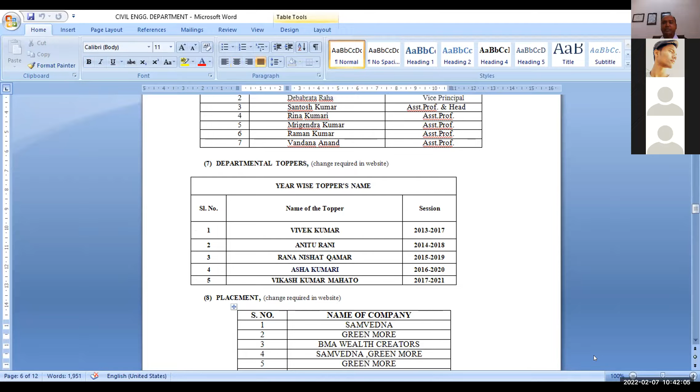In the 2013-17 batch, Mr. Vivek Kumar. In the 14-18 batch, Anitu Rani. In the 15-19 batch, Rana Nishat Qamar. In the 16-20 batch, Asha Kumari. And in the 17-21 batch, Vikash Kumar Mahato.

These are some company names where our students got placed, like Samvedna, Green More, BMA Wealth. Many companies visit our college to select students from different branches.

Our department also achieved some awards, like in cricket tournament and taekwondo. Our department was runner-up in the 4th annual cricket tournament, and the same batch won first prize in the 5th annual cricket tournament in 2019.

And silver medal in taekwondo - at this time I forgot the name of our student who... oh okay, sorry, Payal Kumari. This is the name, Payal Kumari, who won silver medal in taekwondo in 2017.

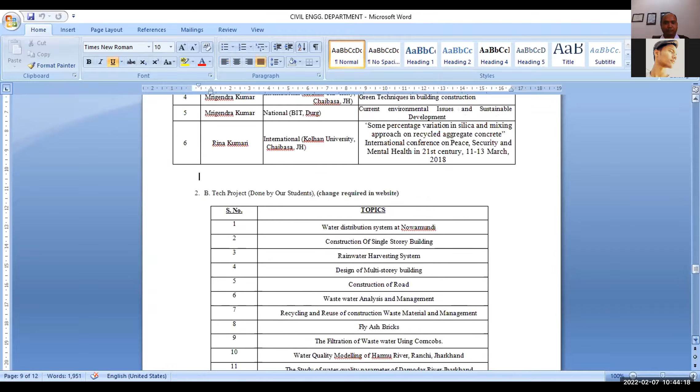These are some events where our faculty members joined workshops and seminars. There are some names of workshops and seminars, and our publications by our faculty members. These are some topics of projects done by our students in previous batches.

These are the labs and semesters that attend these labs. In our department there is also a departmental library where some books are placed, and you can access these books in physical mode. So this is the introduction of our department.

I want to show you some videos with which you can get motivated by our students.

Anyone want to say something? Sandeep Kumar Mahato, yes sir, you want to say something? No sir. Okay, so mute your mic.

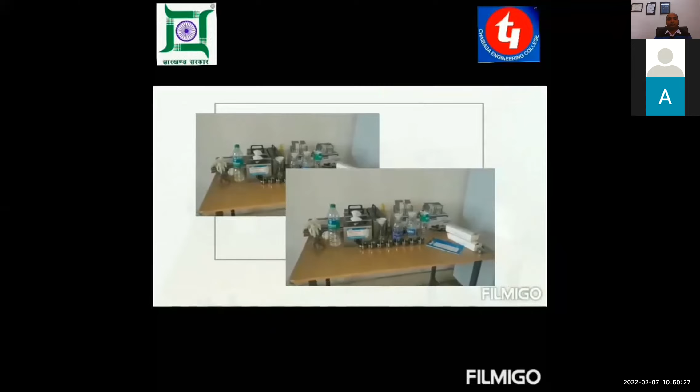So this is some tour of our department. In detail, there is some content shown by other faculty members. So thank you, over to our host, Miss Arpita Ghosh.

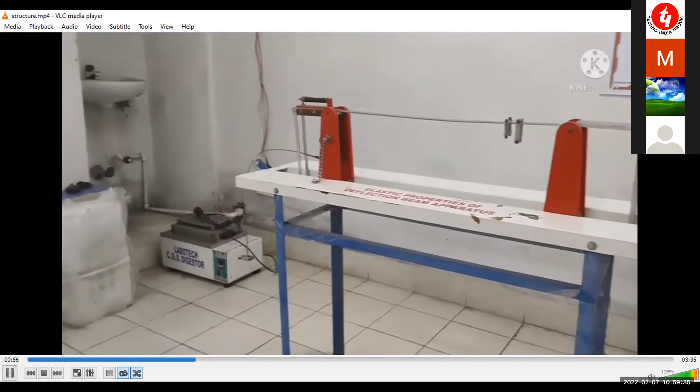And the other apparatus you see here is the simply supported beam used to verify Maxwell's theorem. You can see the simply supported beam.

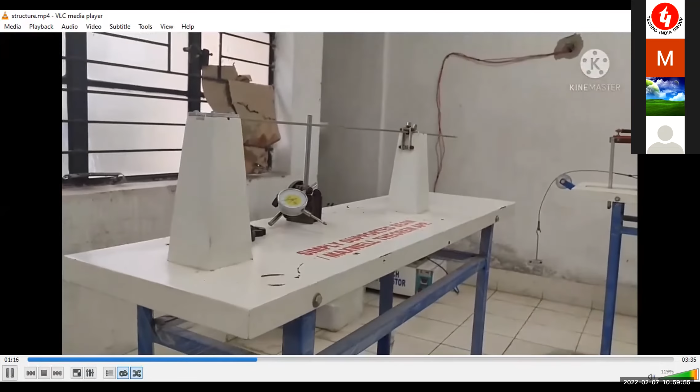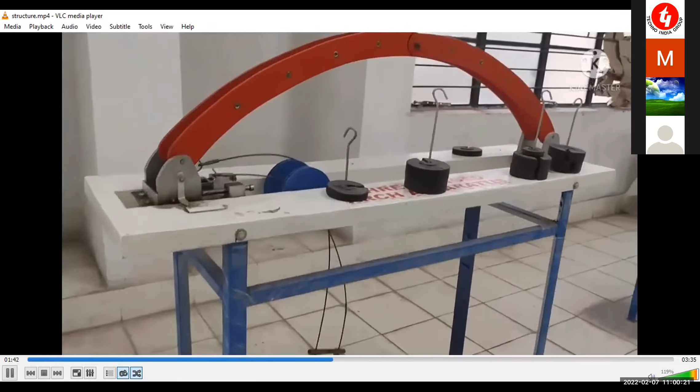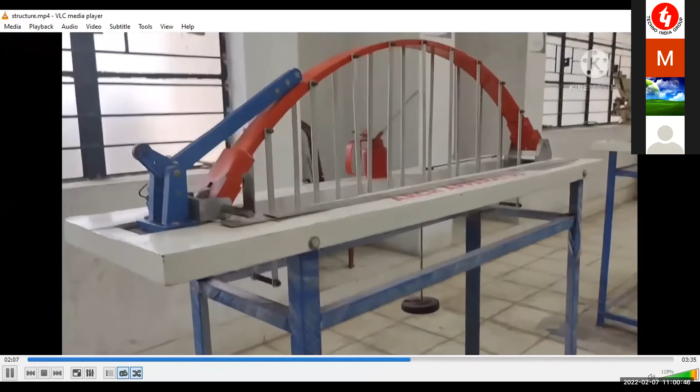Next, we have another apparatus. This is the three-hinge arch apparatus. You can see the three joints here, and next is the two-hinge arch apparatus. In this apparatus, two hinges are used.

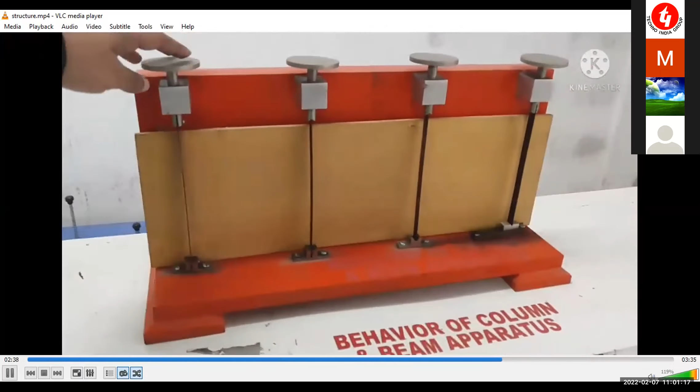You can see all the apparatus in the structure lab. Next, this is the behavior of column and beam apparatus. With the help of this apparatus, we find out the deflection value and critical load.

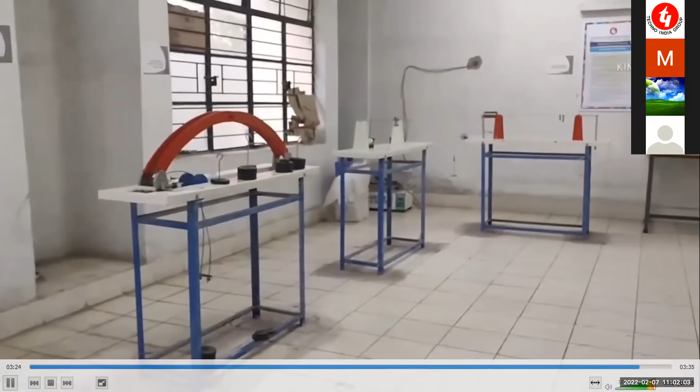In this way, the deflection calculation is done. This is the total view of the structure lab. Thank you, students.

One more thing I want to share with you all: when we construct any building, residential structure, or structure like a dam, reservoir, or overbridge, first of all we calculate the load, and then we plan to construct the structure. So the structural engineering lab is most important in our life.

Structure lab, concrete lab, geotechnical lab, or survey lab—these are the labs which are most important for civil engineers. So everyone should learn about the civil engineering department and its subjects. Okay, proceed, Niranjan sir.

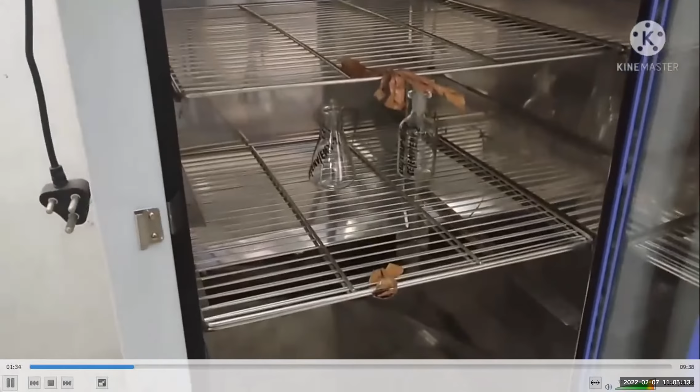Another incubator machine is here. Next you can see the digital turbidity meter. Turbidity can be measured directly with the turbidity meter.

This is a conductivity meter and this is a pH meter. Conductivity meter is used to measure the relative conductivity of various solutions, and pH meter is a scientific instrument that measures the hydrogen ion activity in water-based solutions, indicating its acidity or alkalinity, expressed as pH.

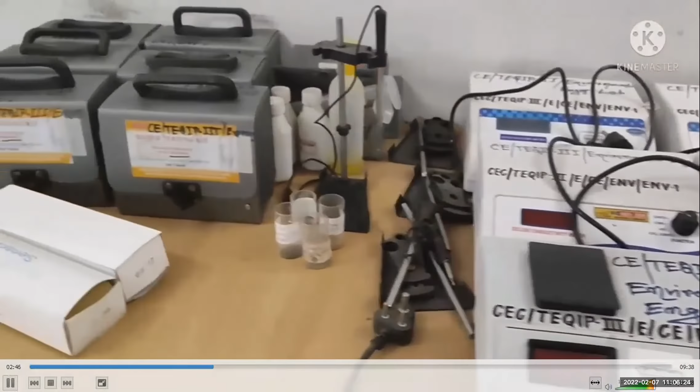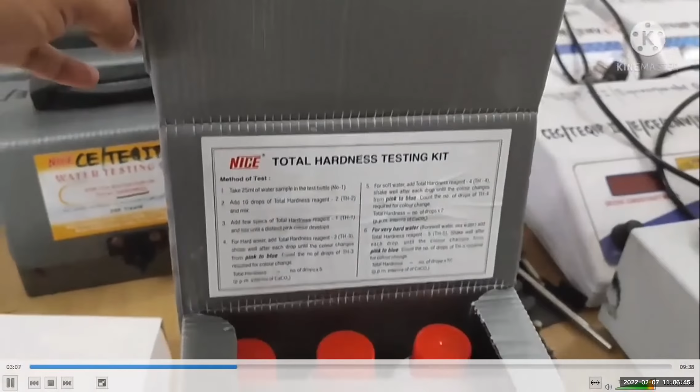Next you see the water testing kit, various types of water testing kits are here. This is the total hardness testing kit. Various kinds of solutions are here. With the help of these solutions we can find out the hardness of water.

Now you can see the pH testing kit. The same chemical or solution is here, so with the help of this solution we can find the pH of water.

This is the same apparatus kit, water testing kit. This is also the same water testing kit.

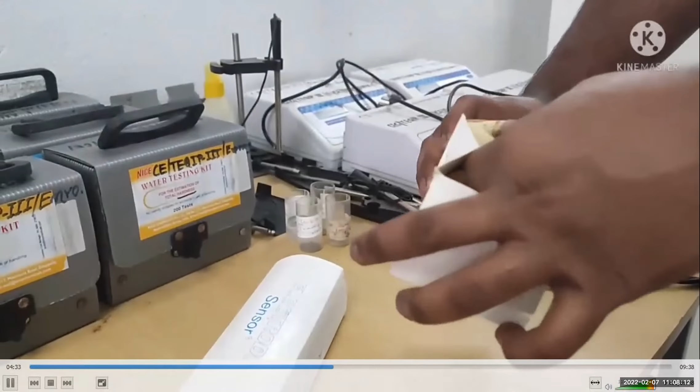This is part of the pH meter, digital pH meter apparatus. This is a part. And then you see the container.

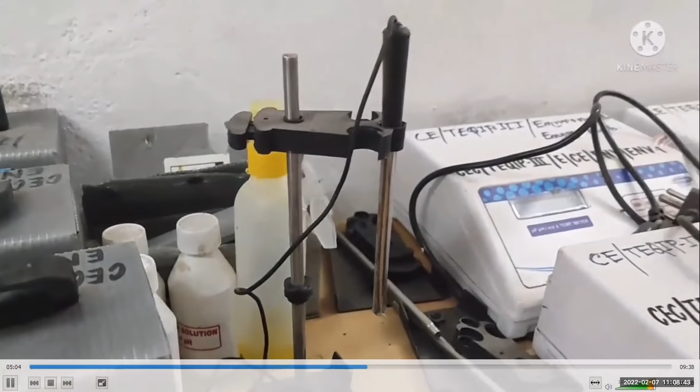Next you can see here, this is a box. In this box we conduct many different types of experiments with the same apparatus. You can find out the dissolved oxygen as well as pH of water. Many experiments are conducted with one apparatus.

This is a container, borosilicate container. It is used for collecting the sample.

This is a solution, this is water indicator, and potassium dichromate. This is sulfuric acid. This is ammonium chloride.

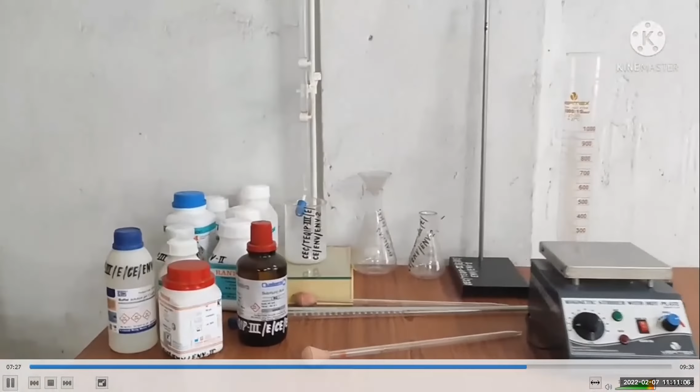For the titration test it is used. This is the burette, this is the conical flask. This is the magnetic stirrer with hot plate.

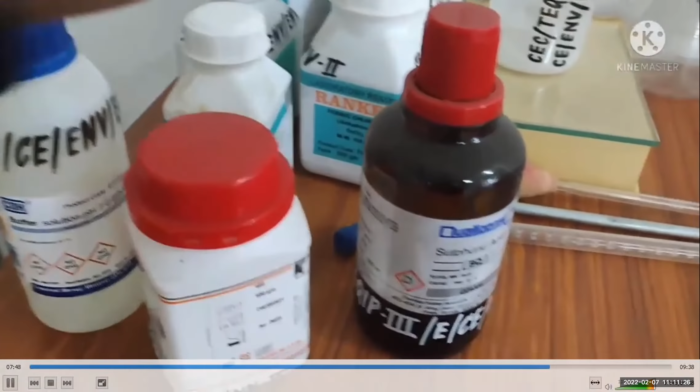Chemicals you see: sulfuric acid, this is sodium thiosulfate, this is buffer solution. This is sodium sulfate, this is ferric chloride, sodium thiosulfate, starch - many chemicals are there.

So next you see the COD digestion apparatus, used for determining chemical oxygen demand in effluent like wastewater, industrial water and sewage water. This is an air quality monitor.

Inhalable particle content is one of the most important indices of measuring air quality. This instrument is used for measuring the air quality.

This is another instrument called jar test apparatus, commonly known as flocculator tester, used primarily in the water treatment and testing industry. It is basically used for wastewater treatment.

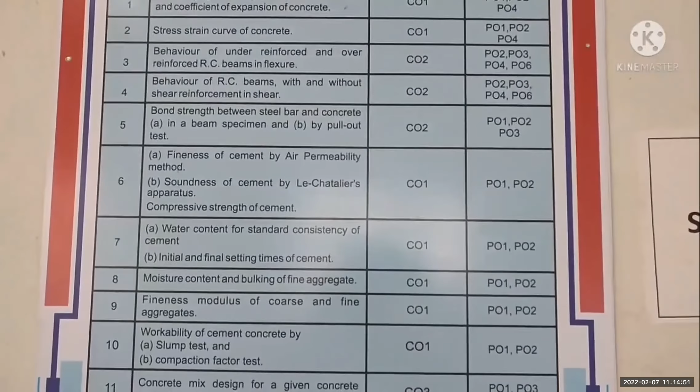First one is initial drying shrinkage, moisture movement and coefficient of expansion of concrete. Second, stress strain curve of concrete. Third, behavior of under-reinforced concrete. Fineness of cement, soundness of cement, as well as slump test, compaction factor test. So many experiments will be conducted in this lab.

When you are in the concrete lab, you must remember the safety precautions. First you see what you will do and don't do. Do: be familiar with your lab assignment before coming to lab. Don't: the use of personal audio or video equipment is prohibited in the laboratory, and maintain silence in the lab.

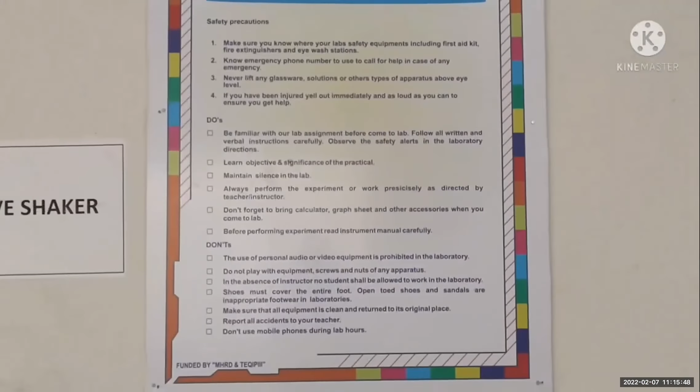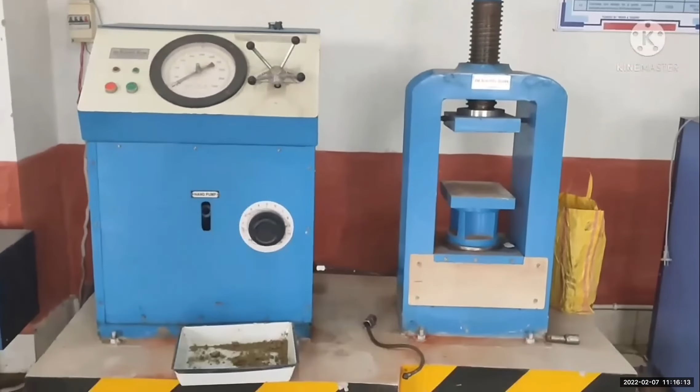Now you can see the first apparatus, compression testing machine, IS 516:1959. With the help of this apparatus we find the value of compressive strength, measuring the compressive strength of cement concrete cube. This machine is hand operated. This is a dial gauge, and the red button is used for off and green button used for on.

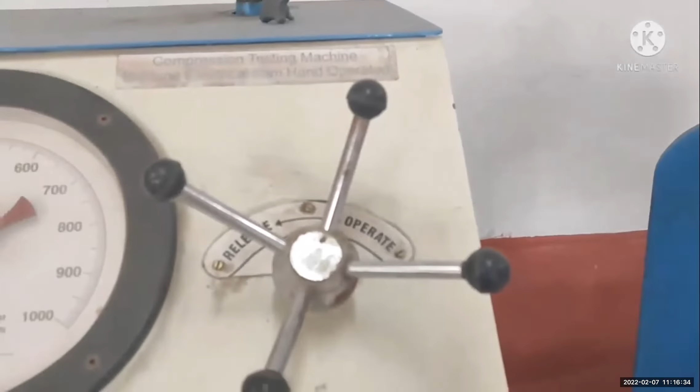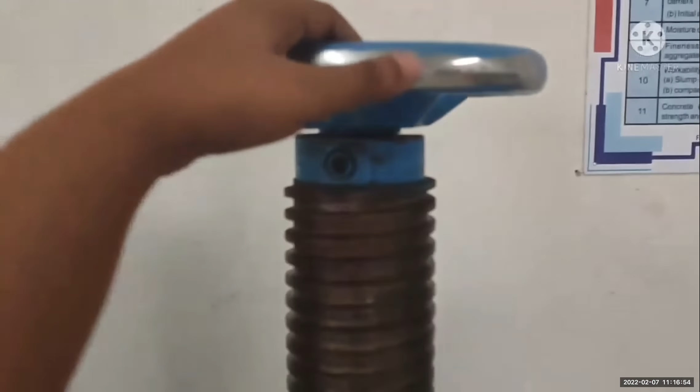In this way you apply the load - first you release the load, then apply the load. The gauge shows how much load is applied on the concrete cube. You see the total apparatus, in this way you adjust the plate. You see the total compression testing machine.

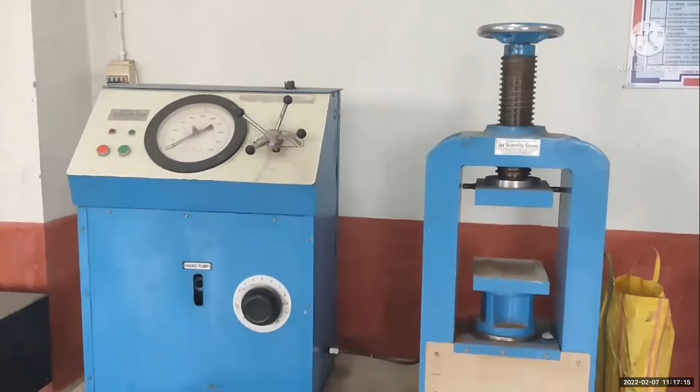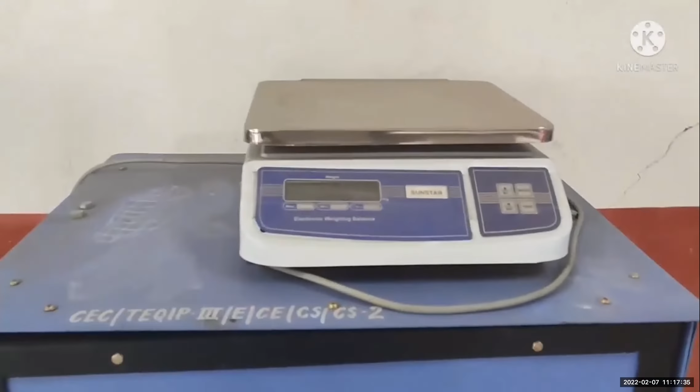Next, this machine you see is the specific gravity testing machine. It is also electrically operated. This is attached with a weighing machine. Basically this machine is used to find out the specific gravity of fresh and hardened concrete. The specific frame is used together with a suitable electronic balance for specific gravity determination of fresh and hardened concrete.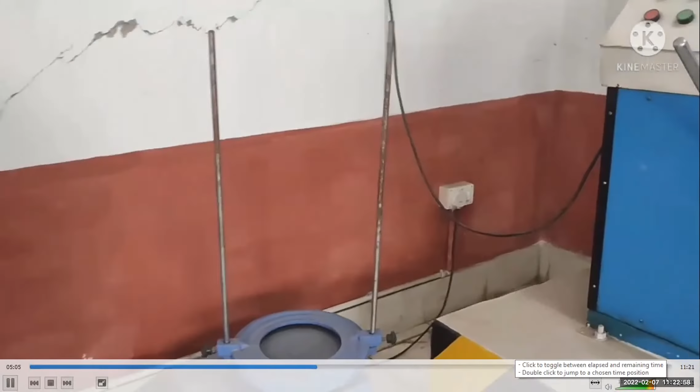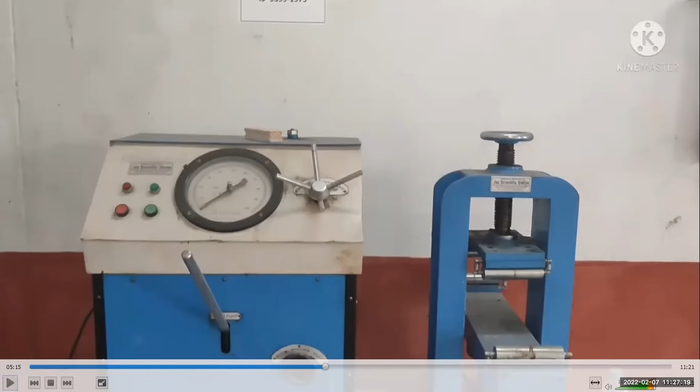This is used for the determination of the flexural strength of concrete. This is the dial gauge, red button and green button, and the handle for load applied.

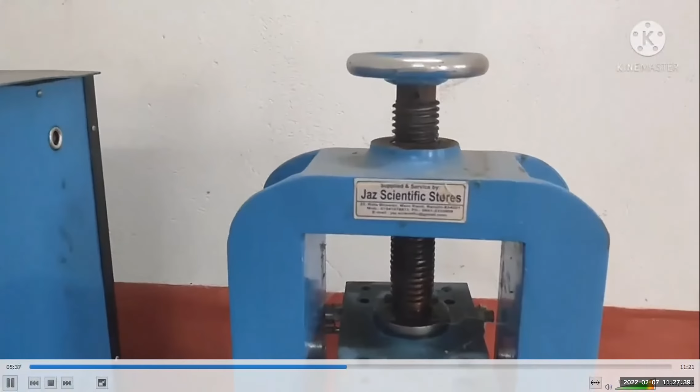Same as the compressive testing machine. This is the fire extinguisher for fire safety.

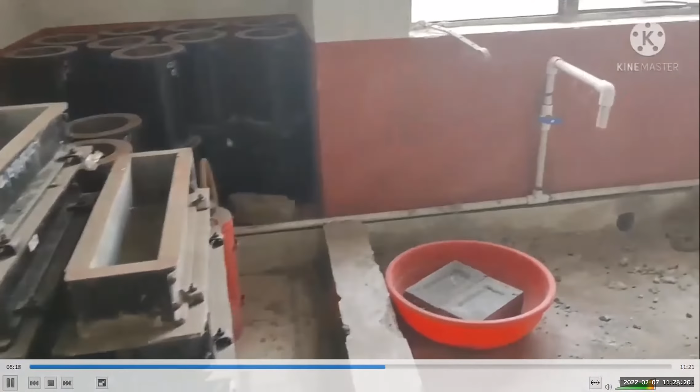Now you can see many molds here. Different types of molds are there. This is a cylindrical mold. This is a beam mold, and this is a cube mold. This is the water line, water tap.

Next, this is a mixture machine. It is used for mixing purposes. It is also operated electrically. This is the switch button.

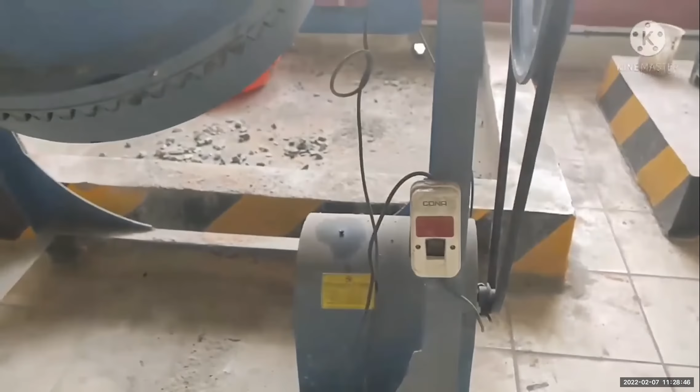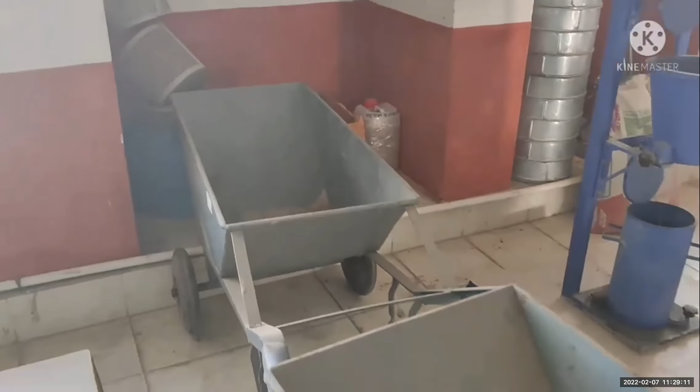Next, I'll show you the vibrating table as per IS code 2514-1963. This is a wheelbarrow. With the help of the wheelbarrow, you can easily transfer any kind of material.

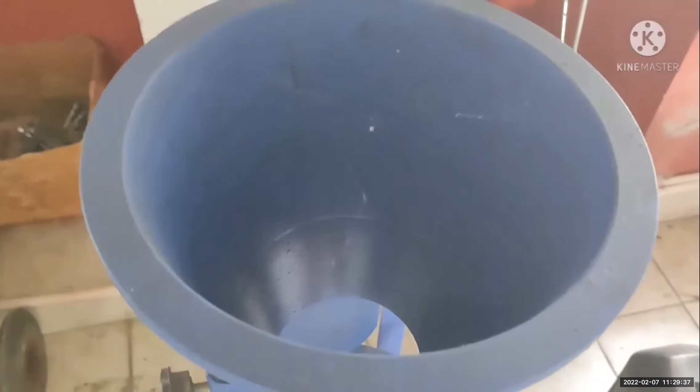You can see this instrument. It is used for the compacting factor test. This machine consists of the upper hopper, lower hopper and cylinder. With the help of this machine, we can measure the workability of concrete. This is the lower hopper, this is the cylinder, used for the compacting factor test.

Next, this is the sieve. There are different sizes of sieve. It measures the particle size.

This instrument is also used to measure the workability of concrete. It is called the slump cone. The slump cone height is 30 cm, top diameter 10 cm, and bottom diameter 20 cm. This is the cone, this is the bottom plate, this is the tamping rod, and this is the handle.

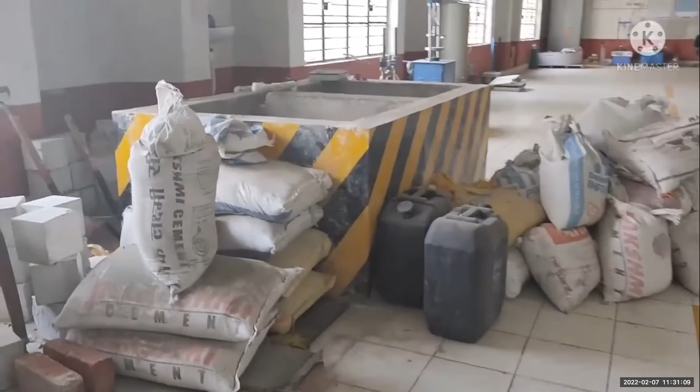Slump test apparatus as per IS code 1199. You can see the laboratory. This is the water tank, the water tank is here.

Now you can see the Vicat apparatus. With the help of the Vicat apparatus, we determine the initial and final setting time. This is a mold, this is also a mold.

This is called the needle. It is used for initial and final setting time. This is called the plunger. It is used to determine the standard consistency of cement.

This is called the Le Chatelier apparatus. The test used for determining the soundness of cement is known as the Le Chatelier test. This is also Le Chatelier apparatus.

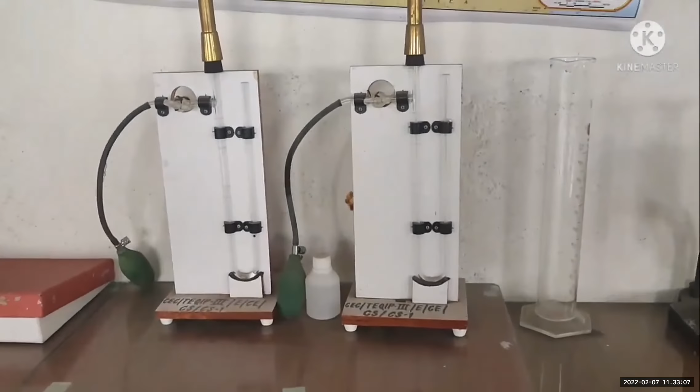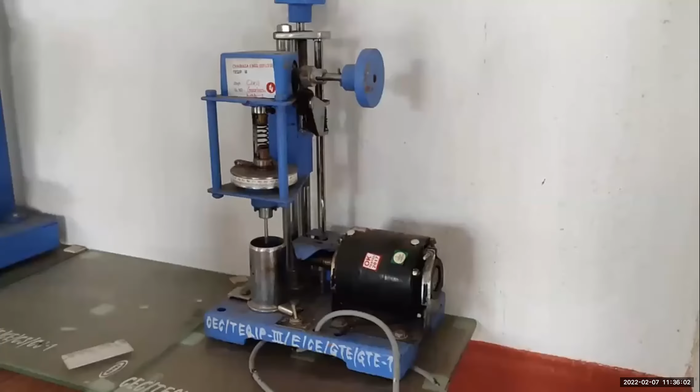This is the vane shear test. This is used to calculate the shear strength of soft saturated clay. This is electrically operated.

This apparatus is used to calculate the shrinkage of soil. This is the pycnometer, the volume of this pycnometer is 900 ml. This is used to calculate the specific gravity of soil. This is brass, conical brass. At the top, there is a hole, and the diameter of this hole is 6 millimeters.

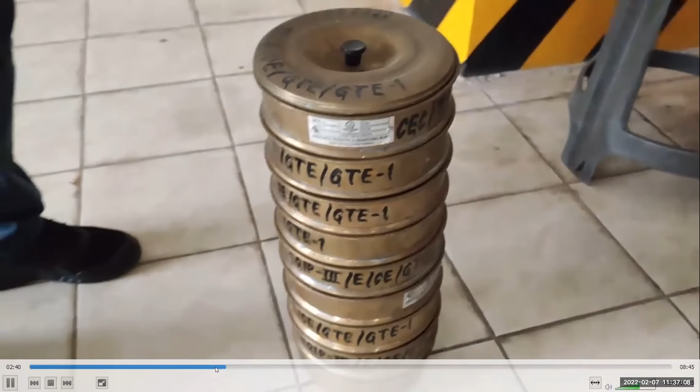The volume of the hydrometer is equal to the volume of the bulb because the volume of the stem is negligible. So the volume of the hydrometer is approximately equal to the volume of the bulb. Of the hydrometer, one is bulb and other is stem, and this is bulb.

These are the set of sieves which is used for the sieve analysis. This experiment is done for the percentage finer and to calculate the gradation of soil.

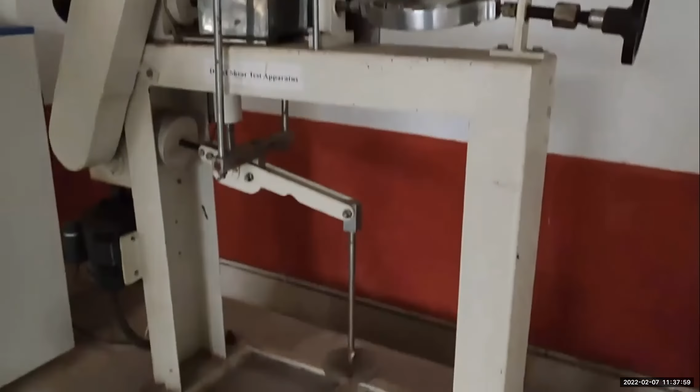This is the direct shear test. This test is used to calculate the shear strength of sandy soil.

This is the proving ring. This is the horizontal dial gauge. This is the vertical dial gauge.

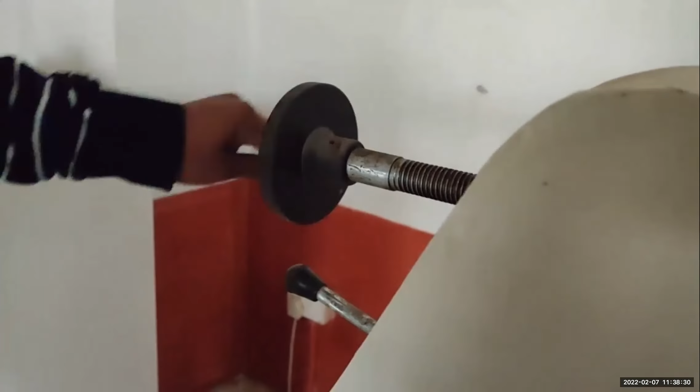Here we are applying normal stress on the sandy soil. If this experiment is manually operated, then shear stress is applied with the help of this handle. It can also operate electrically.

This is the consolidation test apparatus. The consolidation test is done as per IS 2720 Part 15, 1965. It is done to calculate the consolidation settlement of soil. This is a hot air oven.

This is used to calculate the water content of soil by the oven drying method. Now you can see the internal portion of the hot air oven.

This is the unconfined compression machine. This experiment is done as per IS 2720 Part 10, 1991. This test is used to calculate the unconfined compressive strength of clay.

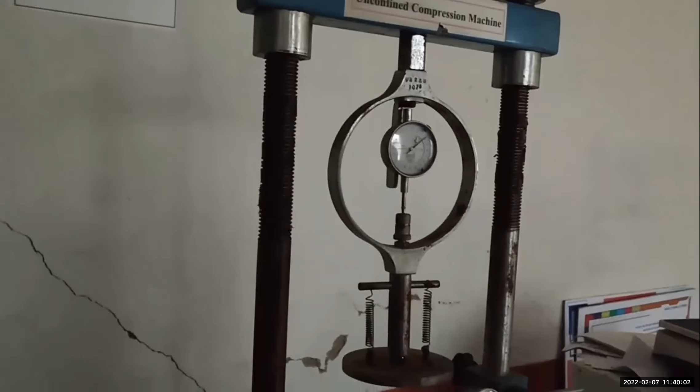Soil specimen is placed at this position. Load is applied electrically as well as manually. This is the proving ring. If this instrument is operated manually, then load is applied with the help of this handle.

This is the core cutter method. It is used to find the unit weight of soil.

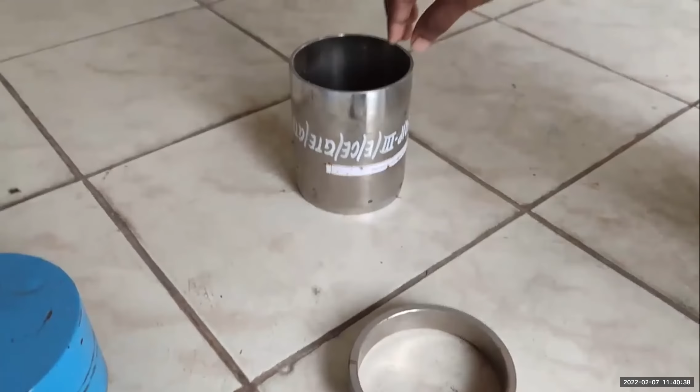This is the rammer. This is the dolly. And this is the core cutter. The internal diameter of the core cutter is 100 mm.

Outer diameter is 105 mm. This is the dolly. The outer diameter of the dolly is 115 mm and the internal diameter is 100 mm.

This is the rammer. The weight of this rammer is 9 kg. The height of this rammer is 900 mm. The diameter of this portion of the rammer is 140 mm.

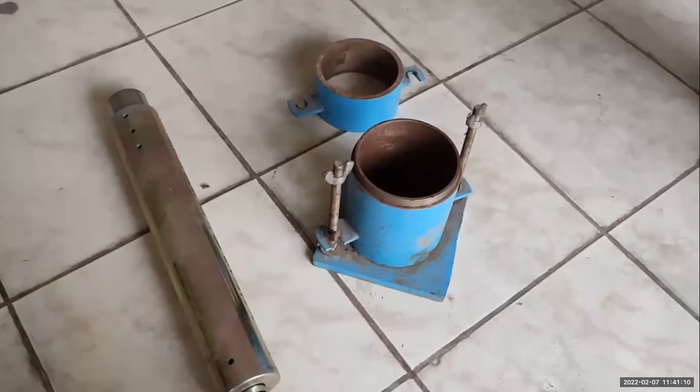This is the standard Proctor compaction test. This is done as per IS 2720 Part 7, 1980.

This is the base plate. This is the cylindrical mold. This is the collar and this is the rammer.

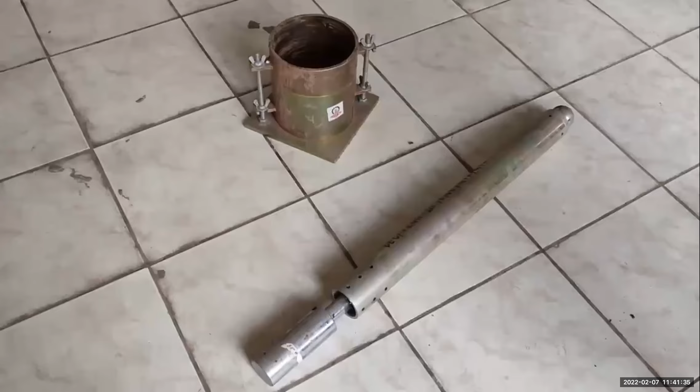This is the modified Proctor compaction test. This is done as per IS 2720.

This portion is the collar. This portion is the cylindrical mold. This is the base plate. This is the rammer. This collar portion can be removed.

Soil is placed in the cylindrical mold in 5 layers. Each layer is compacted with 25 number of blows with the help of this rammer.

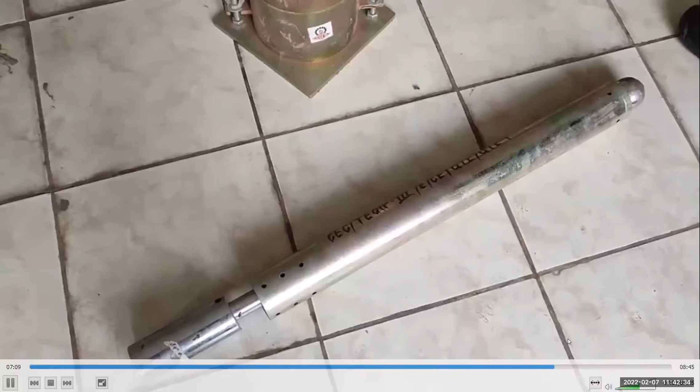The falling head test is used for fine grain soil and the constant head test is used for coarse grain soil. Coarse grain soil means like sand and gravel. Fine grain soil means like silt and clay.

The permeability test is used to calculate the permeability of soil. Permeability of coarse grain soil is more than the permeability of fine grain soil.

This is the CBR testing machine, also known as the California Bearing Ratio testing machine. This experiment is done as per IS 2720 Part 16, 1987. It is used to calculate the strength of the subgrade of pavement and road.

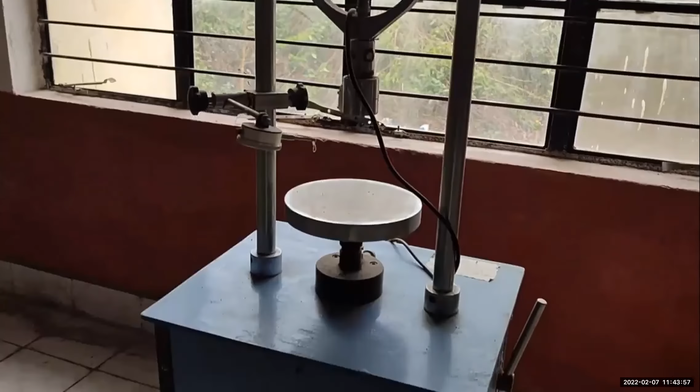Soil specimen is placed at this position. This is the proving ring. This is the vertical dial gauge reading. This machine is operated electrically as well as manually.

In our lab, there are 2 CBR testing machines. This is another CBR testing machine.

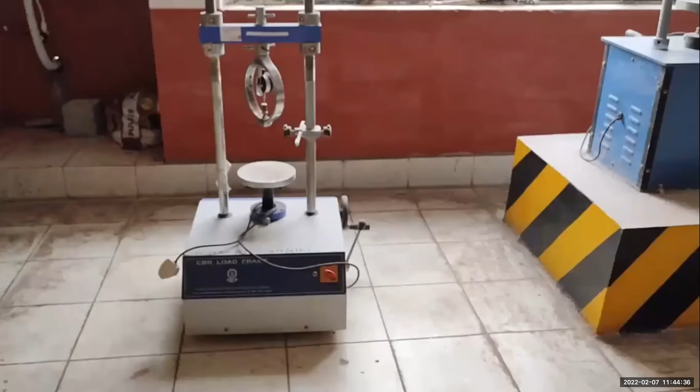This is the entire lab of geotechnical engineering.

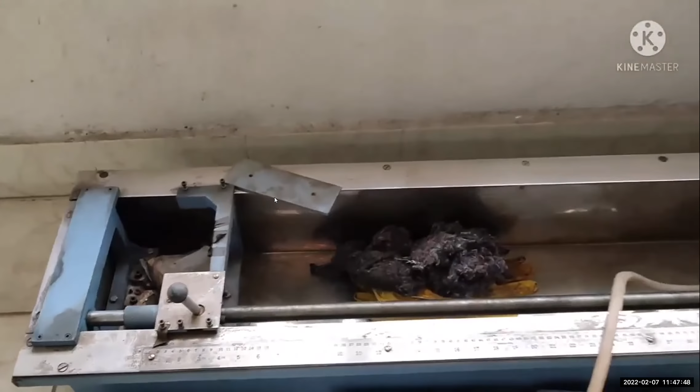And this is the ductility testing machine as per IS code 1208:1978. In this machine we can determine the ductility of bitumen.

This is balance or weight machine. With the help of this machine, we can measure the weight of the aggregate.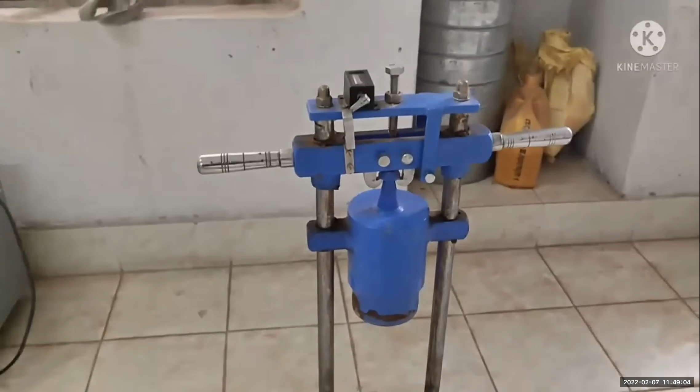This is sieve. Various types of sieves are there, of various sizes. This is water bath.

This apparatus is called penetration testing machine. It is used for test of bitumen. This is mold.

You can see the fire extinguisher.

Total view of the transportation lab.

This apparatus is called bitumen extractor, as per ASTM code.

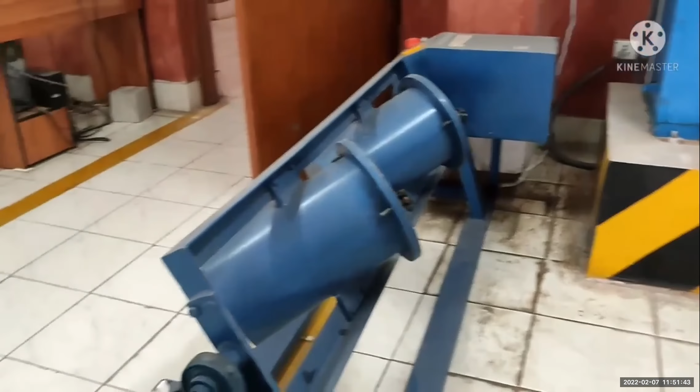Abrasion test is carried out to test the hardness property of the aggregate. The principle of the abrasion test is to find out the hardness property of aggregate. This machine is operated electrically. This is the abrasion testing machine.

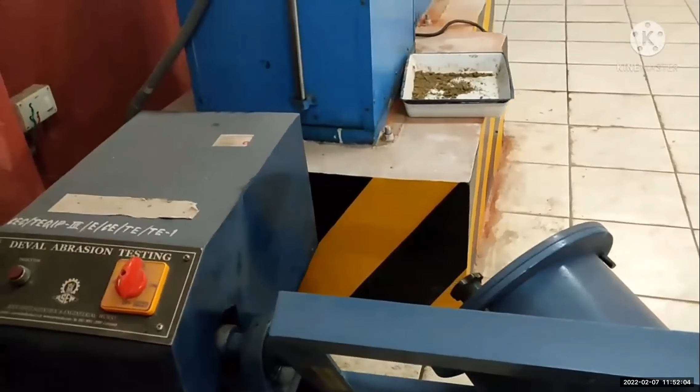Can see the entire lab. This is the transportation lab. Thank you.

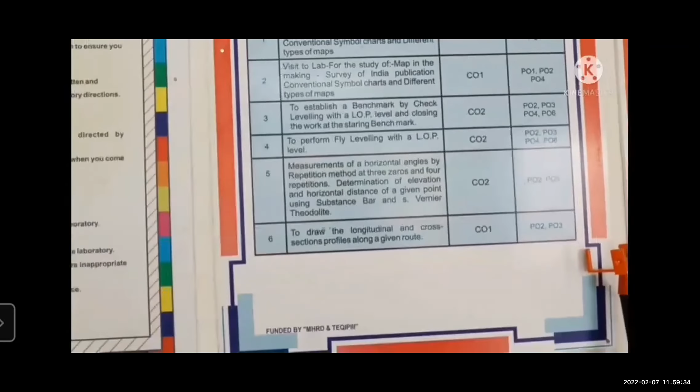After that, we see the name of the experiments we do in our lab. Firstly, Survey of India publication, conventions, symbols, charts and different types of maps; to establish a benchmark by check leveling with a LOP level and closing the work at starting benchmark; to perform fly leveling with a LOP level; determination of elevation and horizontal distance of a given point using subtense bar and micro-optic vernier theodolite; and the last one is to draw the longitudinal and cross-section profiles as given.

This is our survey lab. Firstly, we see the equipments.

This is the ranging rod. This is used in chain survey. As you can see, this is ranging rod. There are different types of rods, all ranging rods.

And then this is staff rod, called staff rod. This is used in leveling. Total length of this rod is 5 meters. You can see.

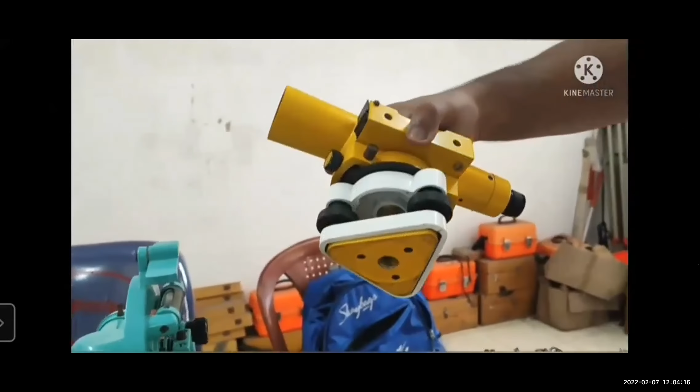Level. The next is the dumpy level. This is the leveling head. This is the foot screw. This is also the objective glass, and this is the eye piece.

This is the bubble tube. This is the focus screw. After that, you see this is the arrow. This is used in chaining survey.

Then we see these wooden things. This is called a peg, and this is also used in chaining survey.

This is the chain, and the total length of the chain is 30 meters, and this is called a link. In this chain there are 100 links, and the length of each link is 30 cm.

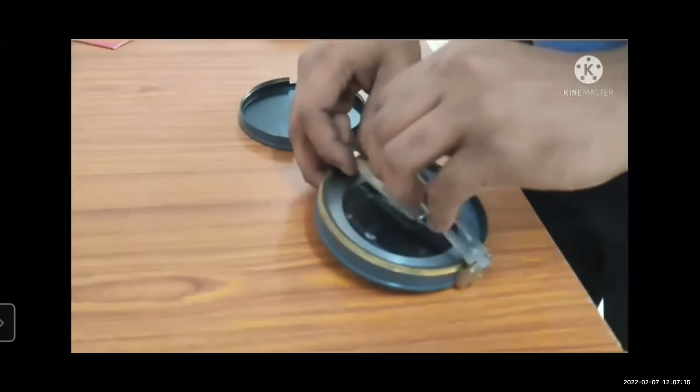This is the objective vane and this is the eye vane. As you can see, this is the cross staff. This is the surveying compass, used in compass surveying.

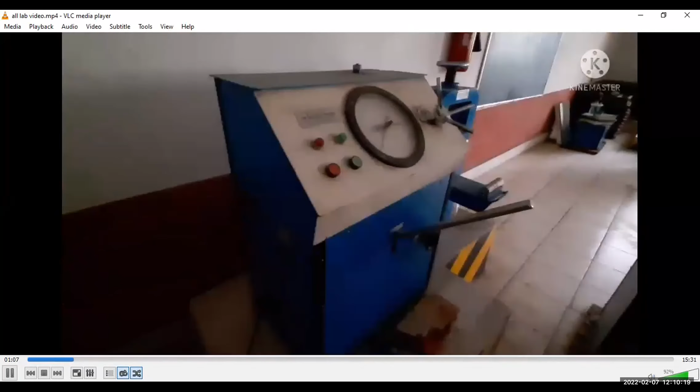They are all in concrete technology. Welcome to Chaibasa Engineering College, Civil Engineering Department.

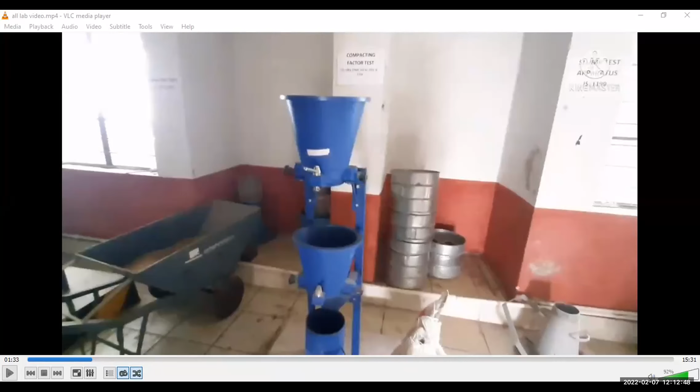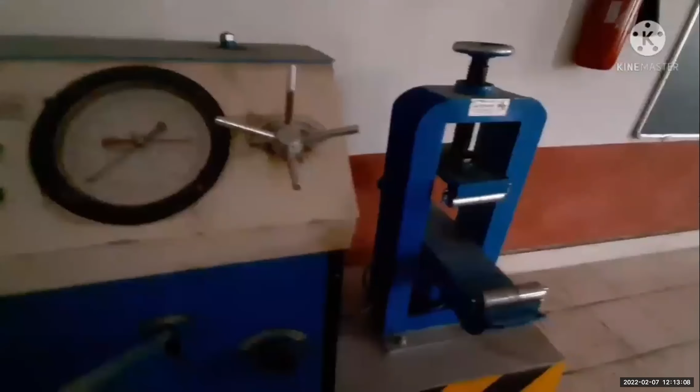Flexural testing machine. In this machine, we will... Here you can see this apparatus is the compacting factor test, which is conforming to BS 1881 part 102 to 105. This apparatus is actually called the compacting factor test. In this machine, we will determine the workability of concrete.

Hello. Hello. I think there is some network issue, so please stop this video. We want Mr. Rajiv to please show the geology lab live.

Okay, Niranjan sir, please show the geology lab online. Okay sir, okay. Start video. Sir, host kijiye.